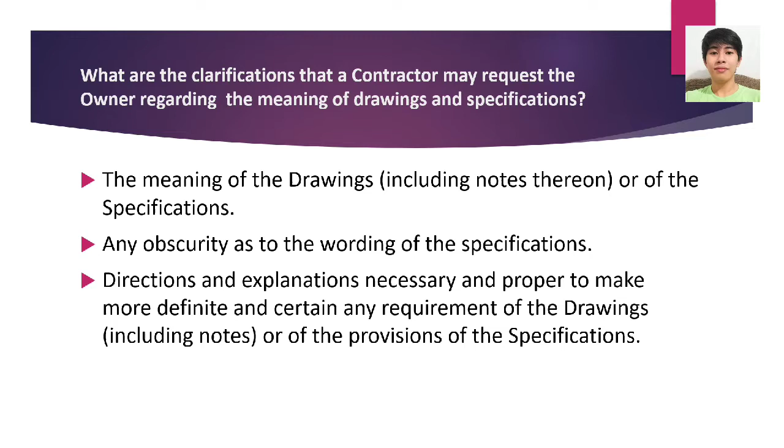So for the last question, what are the clarifications that a contractor may request the owner regarding the meaning of drawings and specifications? These clarifications include the meaning of the drawings, including notes thereon, or of the specifications, any obscurity as to the wording of the specifications, and directions and explanations necessary and proper to make more definite and certain any requirement of the drawings, including notes or of the provisions of the specifications.

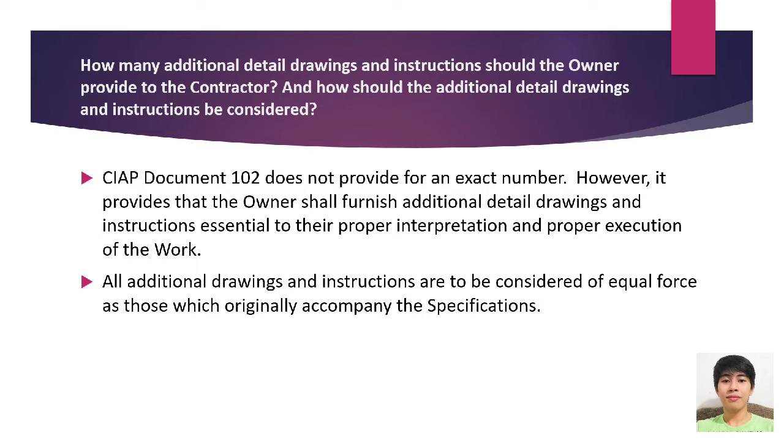Next, we have Article 4, Detailed Drawings and Specifications. How many additional detailed drawings and instructions should the owner provide to the contractor, and how should the additional detailed drawings and instructions be considered? CIAP Document 102 does not provide for an exact number. However, it provides that the owner shall furnish additional detailed drawings and instructions essential to their proper interpretation and proper execution of the work, and all additional drawings and instructions are to be considered of equal force as those which originally accompanied the specifications.

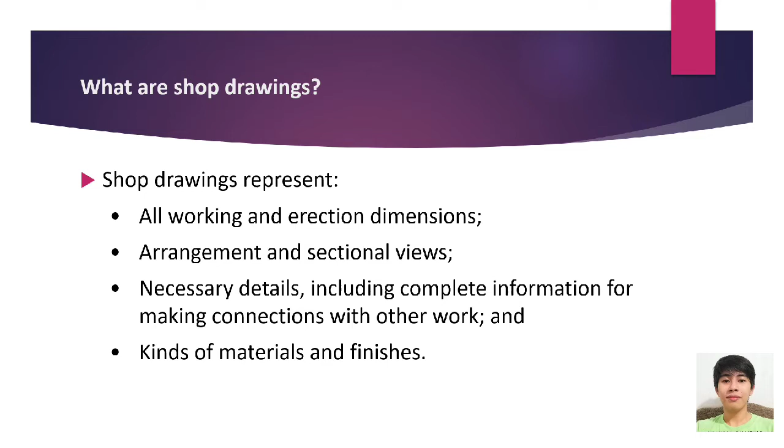Article 5. Shop Drawings. So first, what are shop drawings? Shop drawings represent all working and erection dimensions, arrangement and sectional views, necessary details including complete information for making connections with other work, and kinds of materials and finishes. Shop drawings shall also be dated, numbered consecutively, and shall contain the name of project, the descriptive names of equipment, materials and classified item numbers, and the location at which materials or equipment are to be installed in the work.

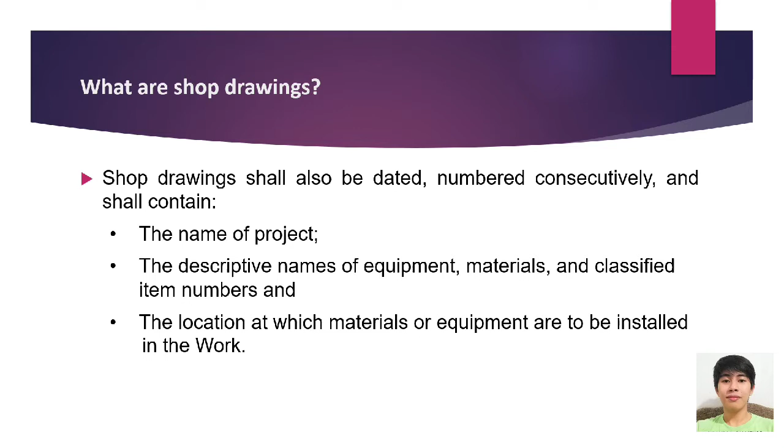Who prepares the shop drawings, and how many shop drawings should the contractor prepare and submit for the owner's approval? The contractor shall prepare all necessary shop drawings at his own expense. The contractor shall submit 2 copies of all shop or setting drawings, templates, patterns, and models. Submission of shop drawings shall be accompanied by a letter of transmittal in duplicate, or 2 copies, containing the name of the project, the contractor's name, number drawings, titles, and other pertinent data.

If the shop drawings show variations from the contract requirements because of the standard shop practice or other reasons, the contractor shall make specific mention of such variations in his letter of submittal. So for our final question, is the owner responsible in all cases for the accuracy of drawings? Generally, the owner is responsible except if the contractor is a specialty contractor or is engaged by the owner as a specialty contractor, in which case it is the specialty contractor which is responsible.

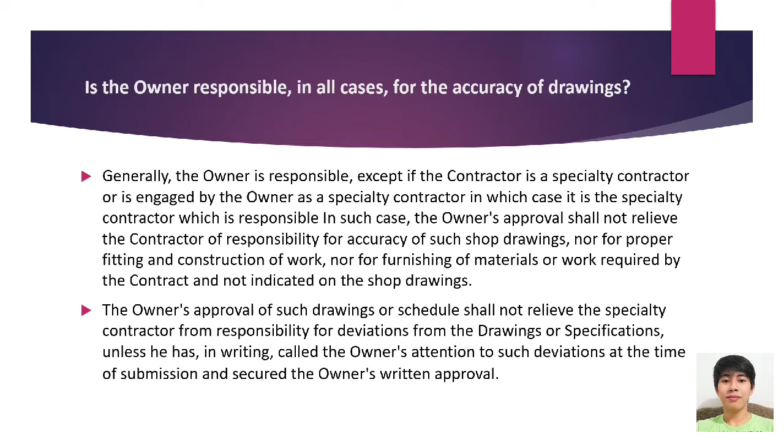The owner's approval shall not relieve the contractor of responsibility for accuracy of such shop drawings, nor for proper fitting and construction of work, nor for furnishing of materials or work required by the contract and not indicated on the shop drawings. The owner's approval of such drawings or schedule shall not relieve the specialty contractor from responsibility for deviations from the drawings or specifications, unless he has, in writing, called the owner's attention to such deviations at the time of submission and secured the owner's written approval. And this ends my report for Section 1, Definitions and Documents.

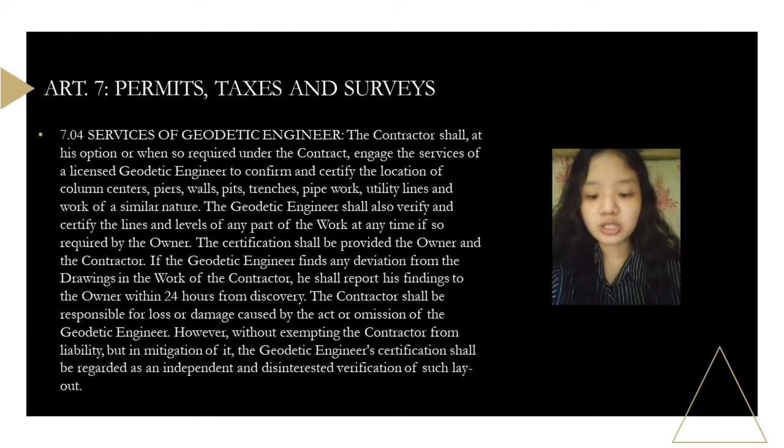7.04 Services of Geodetic Engineer. The contractor shall, at his option, or when so required under the contract, engage the services of a licensed geodetic engineer to confirm and certify the location of column centers, piers, walls, pits, trenches, pipework, utility lines, and work of a similar nature. The geodetic engineer shall also verify and certify the lines and levels of any part of the work at any time, if so required by the owner. The certification shall be provided the owner and the contractor. If the geodetic engineer finds any deviation from the drawings in the work of the contractor, he shall report his findings to the owner within 24 hours from discovery.

Section 3, Equipment and Materials. Article 8, General. All materials and equipment must conform to all laws now or which may be in force and applicable during the period of construction. The contractor shall bear all damages by reason of any delay in the work arising from his failure to comply with this provision. Where any revision or amendment to such laws is made during the construction period which affects the cost or time of completion of the contract, a constructive change in the work shall be recognized and the corresponding contract price and completion time adjustment shall be made.

Article 9, Equipment. 9.01 Quality of Equipment. In order to establish standards of quality, the owner, in the detailed specifications, may have referred to certain equipment by name and catalog number. This procedure is not to be construed as eliminating from competition other products of equal or better quality by other manufacturers where they are fully suitable in design.

9.02 Equipment Substitution. The contractor shall furnish the complete list of proposed substitutions, preferably prior to the signing of the contract, together with such engineering and catalog data as the owner may require. All requests for substitution of equipment shall be in writing. The owner will approve or disapprove the request in writing. No substitute equipment shall be used unless approved in writing by the owner. The contractor shall abide by the owner's judgment as to which proposed substitute items of equipment are judged to be acceptable.

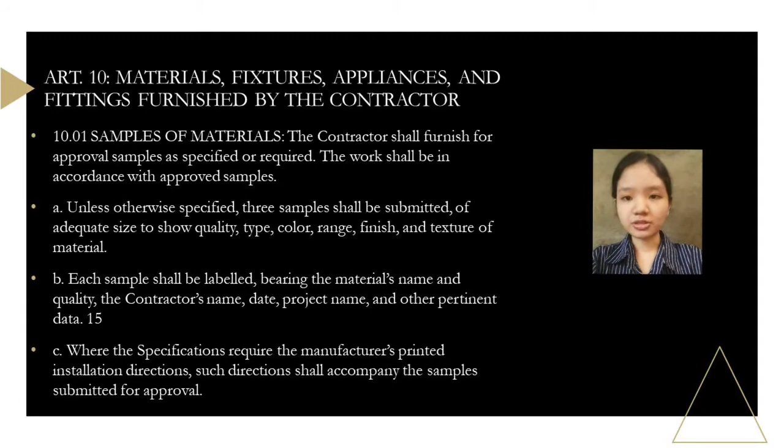Article 10. Materials, fixtures, appliances, and fittings furnished by the contractor. 10.01 Samples of materials. The contractor shall furnish for approval samples as specified or required. The work shall be in accordance with approved samples. From A to E.

10.02 Trade name materials and substitutes listed from A to D. 10.03 Testing samples of materials. The contractor shall submit to the owner as many samples as may be needed for purposes of testing. Testing of all samples shall comply with the specifications and government standards and shall be performed by a competent entity or testing laboratory approved by the owner. All costs of shipment, delivery, handling, and testing of contractor-supplied samples are to be paid by the contractor.

10.04 Quality of materials. Unless otherwise specified, all materials shall be new and their quality shall be of the best grade of their respective kinds, taking into account the nature of the project and requirements of the contract. 10.05 Storage and stockpiling of materials, as listed from items A to C.

10.06 Defective materials. All materials not conforming to the specifications shall be considered defective. The contractor shall remove or replace defective materials when ordered to do so by the owner. Upon the contractor's failure to do so, the owner may remove and replace them and deduct the cost of removal and replacement from any money due or to become due to the contractor. No materials, defects of which have been subsequently corrected, shall be used until the owner's approval is given.

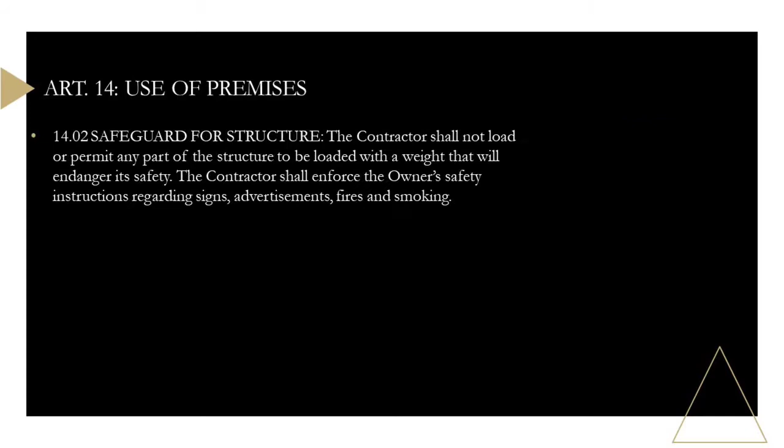Article 14. Use of premises. 14.01. Limitation of use. The contractor shall confine his apparatus, the storage of materials, and the operations of his workmen to limits indicated by law or directions of the owner, and shall not unreasonably encumber the work premises with his materials. The contractor shall not load or permit any part of the structure to be loaded with a weight that will endanger its safety. The contractor shall enforce the owner's safety instructions regarding signs, advertisements, fires, and smoking.

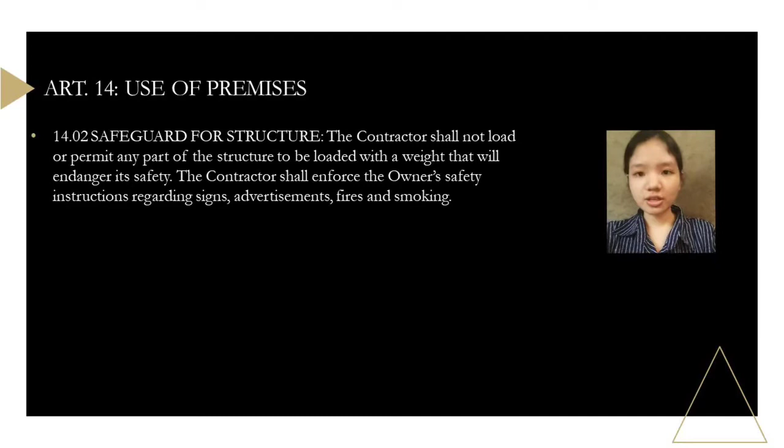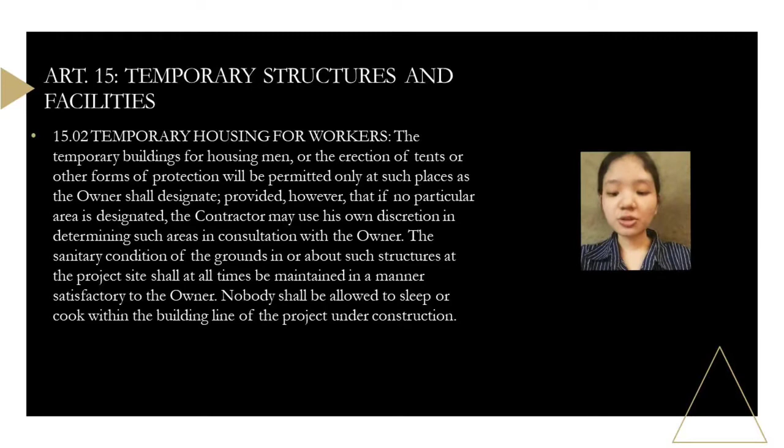Article 15. Temporary structures and facilities. 15.01. Temporary office and contractor's building. The contractor shall, taking into account the location and size of the site, at all times provide and maintain an adequate, weathertight temporary office with necessary basic facilities such as water, light, and telephone. 15.02. Temporary housing for workers. The temporary buildings for housing men or the erection of tents or other forms of protection will be permitted only at such places as the owner shall designate, provided, however, that if no particular area is designated, the contractor may use his own discretion in determining such areas in consultation with the owner.

15.03. Safety and sanitation. The contractor shall, from the commencement of the work until its completion: A. Furnish and put up all temporary barricades and guard lights necessary for the protection, proper prosecution, and completion of the work. B. Maintain guard lights at the top of the falsework tower, barricades, railing, etc. C. Provide and maintain ample sanitary toilet accommodation and other necessary conveniences, including water connections for the use of personnel and laborers on the work, properly secluded from public observation in such manner and at such points as shall be provided or approved by the owner, and their use shall be strictly enforced. D. Keep such places clean and free from flies. And E. Remove all connections and appliances connected therewith prior to the completion of the work.

15.04. Temporary signs. No signs or advertisements will be allowed to be displayed without the owner's approval. The contractor may erect one painted sign giving the names and addresses of the owner, the contractor, and the various subcontractors. The owner shall approve the size, color, lettering, and location of such temporary signs.

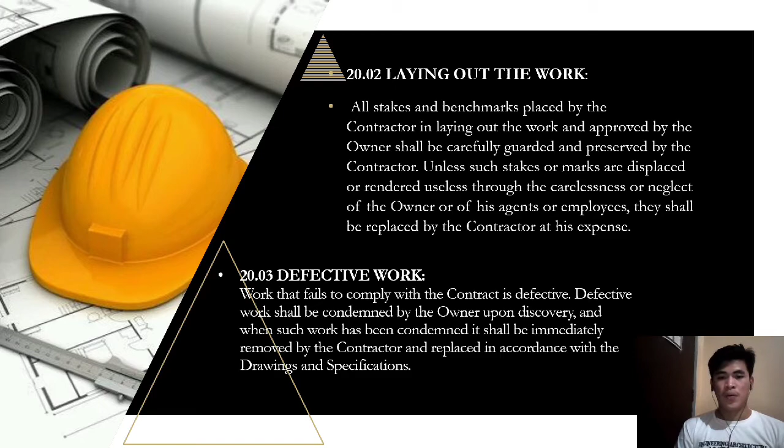20, Section 4. The inspection of work. The owner shall have access at all times to the work. The contractor shall furnish, without additional charge, reasonable facilities, labor, and materials necessary for the convenient inspection and tests that may be required by the inspector. The owner should provide inspectors authorized to witness the pouring of concrete. The absence of the owner's inspector at any time during the progress of the work shall be an implicit approval of the quality of the cement mix and the authority to pour it.

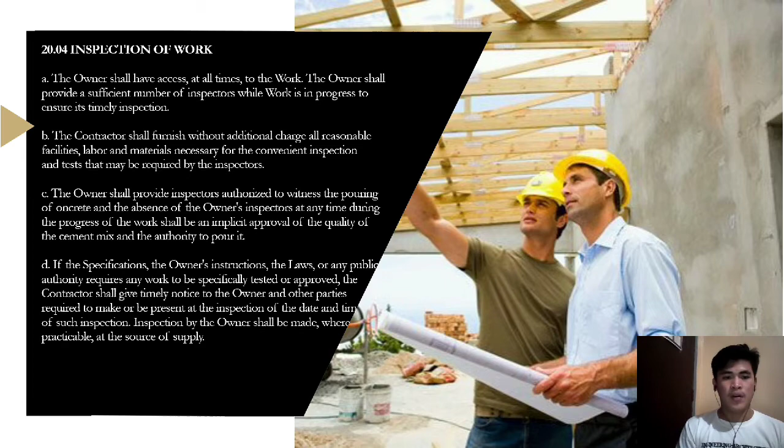If the specification, the owner's instructions, the law, or any public authority requires any work to be specifically tested or approved, the contractor shall give timely notice to the owner and other parties required to make or be present at the inspection of the date and time of such inspection. If any work should be covered up without timely notice to the owner or before the owner can make a timely inspection thereof, it must, if required by the owner, be uncovered for examination at the contractor's expense.

However, notwithstanding the failure of the owner to make a timely inspection of the work before it is covered, its re-examination may be ordered by the owner, and if so ordered, the work must be uncovered by the contractor at the owner's expense. But if such work is found not in accordance with the contract, the contractor shall shoulder the cost of uncovering and redoing the work.

If there are indications that the work done is not in accordance with the drawings and specifications, the owner may at any time before final acceptance of the work make an examination of the portion already completed by removing or tearing out the same. The contractor shall on request furnish all necessary facilities, labor, and materials. If such work is found to be defective in any material respect due to the fault of the contractor or his subcontractor, the contractor shall defray all the costs of such examination and of satisfactory reconstruction. And all inspections and tests shall be performed so as not to delay the work unnecessarily.

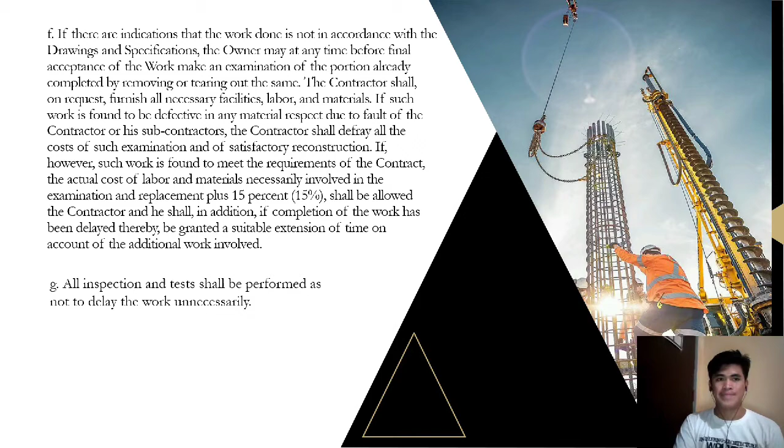Article 20, Passage 5. Work during an emergency. The contractor shall perform any work and shall furnish and install all materials and equipment necessary during an emergency endangering life or property. In such cases, Article 18 Passage 1 shall apply.

Article 20 Passage 6, increase or decrease quantities of work. Adjustment in works drawing to suit field conditions which cannot be foreseen at the time of calling for bids may be necessary during construction. It is the essence of the contract to recognize such changes in drawing as normal. The resulting change in quantities or the increase in the scope of work of the contractor shall be covered by a change order. Work done by the contractor without timely notice to the owner that an adjustment is required of contract price and completion time shall be at his own risk and expense.

Passage 7. Changes in the work. Change order by owner. The owner may at any time order extra work or make changes by altering, adding to, or deducting from his scope of work and within the general scope thereof, provided, however, that the resulting overruns or underruns from the quantities or costs in the bid do not exceed 25%. Such changes shall be ordered by the owner in writing.

Changes of subsurface condition. If during the progress of the work subsurface conditions at the site materially different from those shown on the drawing or indicated in the specification or in the contract document are discovered or encountered, the attention of the owner shall be called to such conditions before they are disturbed. The work shall be executed under the conditions of the contract. If changes under paragraphs A and B shall cause an increase or decrease in the amount due under the contract or in the time required for its performance, an equitable adjustment shall be made and the contract modified accordingly.

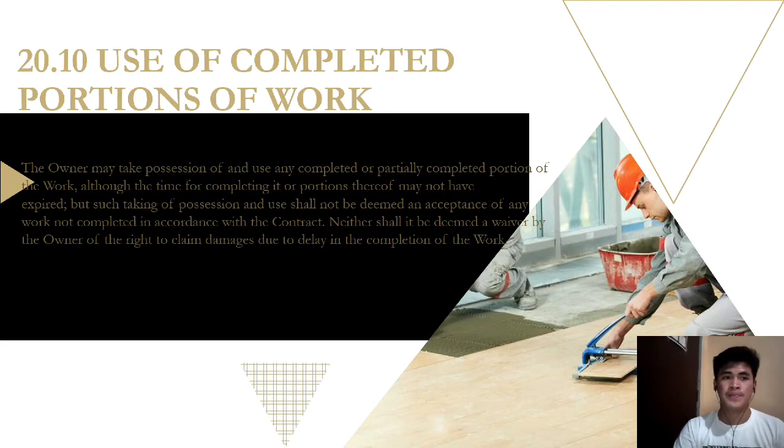Passage 11. Substantial completion and its effect. There is substantial completion when the contractor completes 95% of the work, provided that the remaining work necessary to complete the work shall not prevent the normal use of the completed portion. The owner shall be deemed to have recognized substantial completion of the work through the approval by the owner of the contractor's billing for completing at least 95% of the work.

The issuance of a certificate of substantial completion is an equivalent document. However, the date of this document should not be controlling if the substantial completion is shown to have been made at an earlier date, unless the contractor accepts the certificate without taking exceptions thereto in writing within 15 days from receipt.

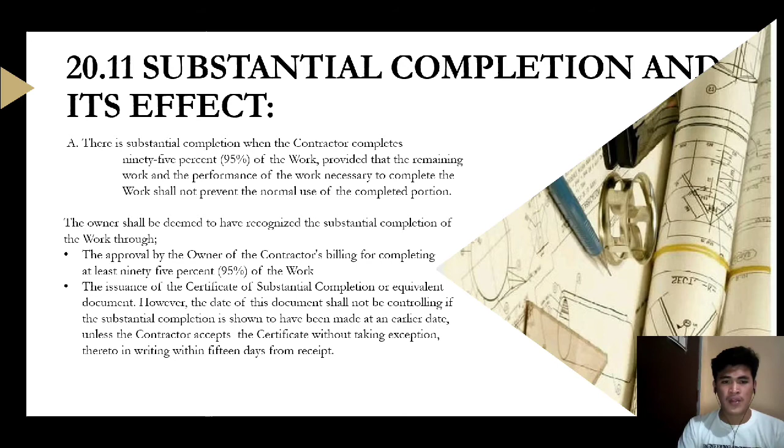The equipment, fixtures, and furnishings installed by the contractor, which the contract requires to be test run prior to acceptance, shall be test run successfully before the work can be accepted as substantially completed. The owner shall without delay cause the test run of the facility. Should the contractor be unable to completely install or furnish and test run the facility through no fault of his, the contractor shall automatically be entitled to an extension of completion time equal to the period of delay.

Issue to the contractor one or more lists of defects found or discovered on the completed work, otherwise known as a punch list, which the contractor must receive from the owner not later than 30 days from the date of substantial completion. The owner may add to the punch list items, but only as to corrected work on the items in the original punch list, not later than 60 days from the date of substantial completion.

No liquidated damages for delay beyond the completion time shall accrue after the date of substantial completion of the work. If the targeted date of completion has arrived and the contractor cannot achieve 95% completion of the work due to the uncompleted facility caused by the owner's fault, the contractor shall be deemed to have achieved substantial completion provided the contractor has completed at least 95% of the work minus the uncompleted facility.

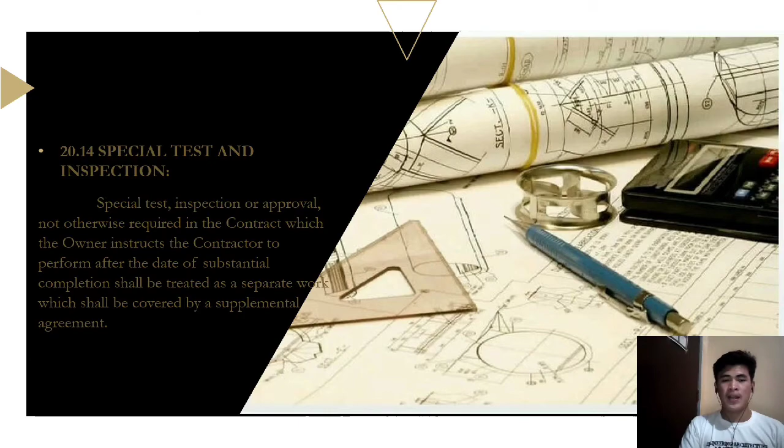Special test inspection. Special test, inspection or approval not otherwise required in the contract which the owner instructs the contractor to perform after the date of substantial completion shall be treated as a separate work which shall be covered by a supplemental agreement. Passage 15. The acceptance of non-conforming work. If the owner accepts defective or non-conforming work instead of requiring its removal and correction, the owner shall issue to the contractor a change order to reflect a reduction in the contract price where appropriate, by an amount not exceeding the value of the unfinished work as determined by the breakdown of work and the corresponding value.

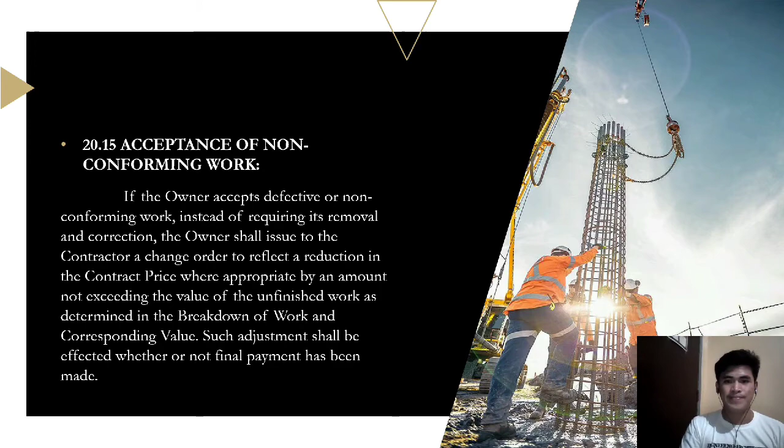Passage 16. The adjustment of prices. There shall be added to or deducted from the contract price such sums affecting the execution of the work, as follows. Adjustment of prices due to the escalation or reduction of cost of executing the work shall make use of a parametric formula to be agreed upon within 30 days by the parties. In default of such agreement, the parametric formula under applicable law shall be applied. Such an adjustment shall be made to provide equitable relief to both the owner and the contractor, allowing neither to gain nor lose by such fluctuation. The adjustment of prices shall be determined on the basis of the original contract unit prices of labor and materials and such unit prices in effect during the relevant period of work accomplishment.

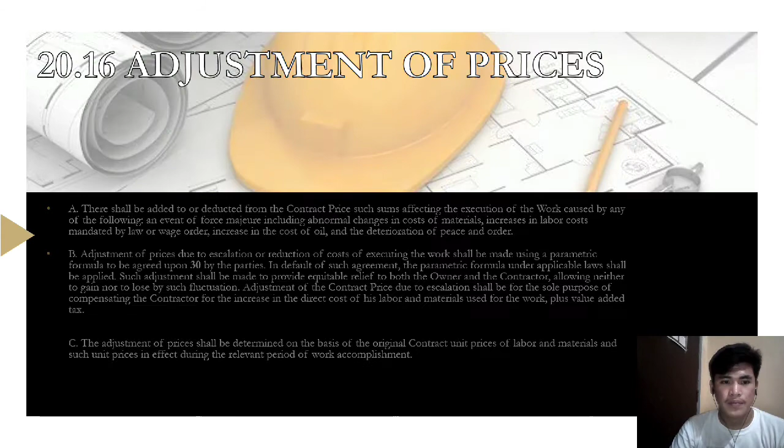Prices shall be adjusted not oftener than once a month due to the increase or decrease of the direct cost of labor and materials of more than 5% of the original contract unit price of the relevant items of work. The adjustment shall include the first 5%. In case the project is behind schedule by more than 15% from the approved construction schedule, not due to excusable delays, the payment for work accomplished shall be made on the basis of the contract price as adjusted in accordance with the escalation rate applicable during the period in which it should have been accomplished. This Article 20.16 shall not apply to an increase or decrease in the cost of materials and services provided or supplied by the owner.

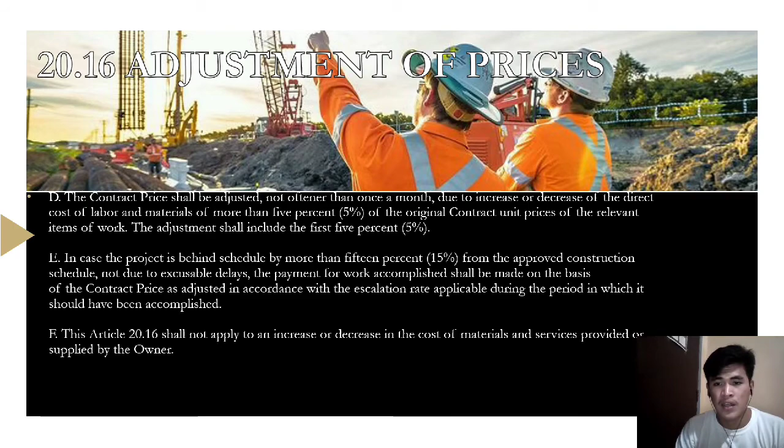Passage 17. Payment in legal tender. Payments in money under the contract shall be made in the currency stipulated, and if it is not legally possible to deliver such currency, then in the currency which is legal tender in the Philippines.

Section 6. Time of completion of work. When does the work commence and what is the period for its completion? Construction starts within 7 days upon receiving the notice to proceed unless may later date na in-state sa contract. For premature commencement, it is in the risk of the contractor unless mutual decision yun ng owner and the contractor, and the owner gave the contractor authority to start the work earlier. For completion naman, it shall be completed in accordance with the contract in a fixed date.

What is the construction schedule and what is its content? Construction schedule contains the approximate date each paid item will be started and completed, the equipments to be used, and number of men needed to complete the work and schedule, and this must be submitted immediately after the contract is effective. What happens in case of slippage or delays? In case of delay, pwede magpatawag ng meeting ng owner, and kapag napag-alaman na ang delay is caused by the contractor's negligence, the contractor must submit a catch-up schedule at dapat approve ito ng owner.

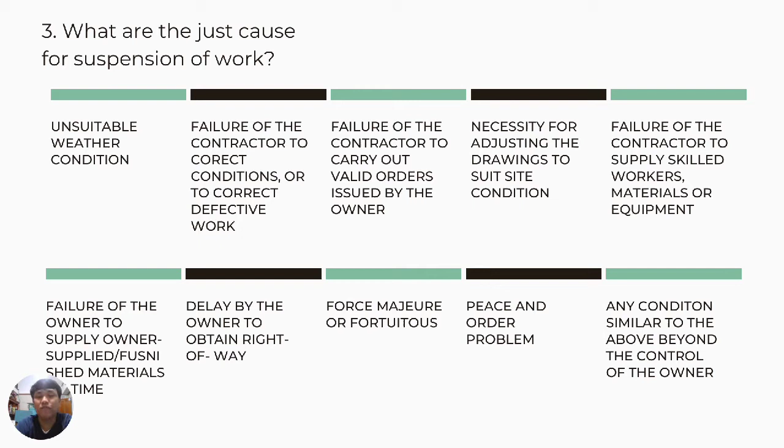And 6, failure of the owner to supply owner-supplied or furnished materials on time. 7, delay by the owner to obtain right-of-way. 8, force majeure or fortuitous event. Ito yung mga out-of-hand na event tulad ng gera, kung sakali man, huwag naman sana. And 9, peace and order problem. And 10, any condition similar to the above beyond the control of the owner.

Article 28, owner's right to terminate contract. Number 1, can the owner terminate contract without prior notice to the contractor? Yes, upon occurrence of any of the following events. Number 1, if contractor is adjudged bankrupt or insolvent. 2, if contractor makes a general assignment of his assets for the benefit of his creditors. Number 3, if a trustee or receiver is appointed to the contractor or for any of the contractor's property. And last, if the contractor files a petition for suspension of payments or for reorganization under the bankruptcy law.

Number 2, are there instances when the owner is required to give prior notice before terminating the contract? Answer is yes. The following grounds for termination with cause require 15 days written notice. Number 1, the contractor repeatedly fails to supply sufficient number of skilled workmen, or suitable materials or equipment in the schedule. Number 2, a contractor repeatedly fails to make without just cause prompt payments to subcontractors for labor, materials, or equipment, and completion of the work is being delayed. Number 3, the contractor disregarded the laws or orders of any public body having jurisdiction. And last, the contractor otherwise violates in any substantial way any provision of the contract.

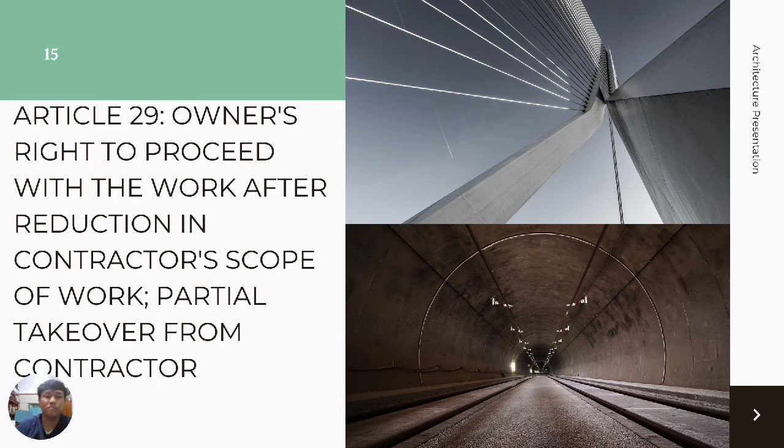Article 29, owner's right to proceed with the work, reduction in contractor's scope of work, partial takeover from contractor. Number 1, when can owner elect to carry out the work? The owner may, after 7 days following the receipt by the contractor of written notice and without prejudice to any other remedy, and without terminating the contract, elect to carry out the work if the contractor, number 1, repeatedly fails to supply sufficient skilled workmen or suitable materials and equipment. Number 2, repeatedly fails to make prompt payments to subcontractors for labor, materials, or equipment. Last, fails to perform the work in accordance with the contract.

Number 2, what happens to the materials and equipment at the site? Kailangan alisin ng contractor ang mga materials and equipment na hindi naman kailangan ng owner para sa project. At kung ang materials or equipment ay hindi pa pag-aari ng contractor, may choice ang owner kung gagamitin niya ito o hindi. At kung gagamitin naman ay kailangan magbayad ng renta or upa para sa mga materials and equipment na gagamitin ng owner.

Number 3, what are liquidated damages? Liquidated damages are those agreed upon by the parties to a contract to be paid in case of delay in completion of the work.

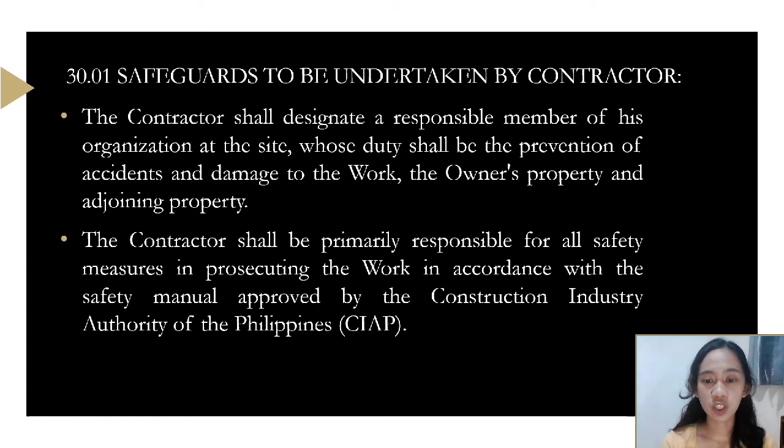The contractor shall designate a responsible member of his organization at the site, whose duty shall be the prevention of accidents and damage to the work, the owner's property and adjoining property. The contractor shall be primarily responsible for all safety measures in prosecuting the work in accordance with the safety manual approved by the Construction Industry Authority of the Philippines, or CIAP.

The next one is Article 30.02, or owner not to be responsible. The contractor shall render the owner free and harmless for the death of, the disease contracted or injury received by the contractor or any of his employees or laborers, for any damage done by or to the contractor's plant or materials from any source or cause, and for damages caused by the contractor or his employees to any property of the owner and adjoining property.

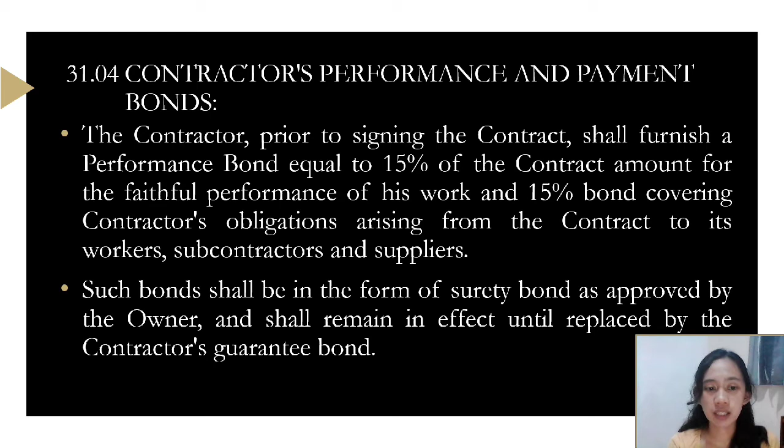Such bonds shall be in the form of surety bond as approved by the owner and shall remain in effect until replaced by the contractor's guarantee bond. Sunod naman ay ang contractor's guarantee bond. The performance and payment bonds will be released by the owner upon posting by the contractor of a guarantee bond, equivalent to the amount of the retention released to the contractor. The guarantee bond shall be for a period of 1 year, commencing from the date of posting as a guarantee that all materials and workmanship installed under the contract are of acceptable quality.

So, guarantee bond, these are funds released to the contractor once work is done and it guarantees the great work or at least of acceptable quality. The next kind of bond is the contractor's guarantee warranty. The contractor shall, in case of work performed by his subcontractors and where guarantees are required, secure guarantees from said subcontractors and deliver copies of the same to the owner upon completion of work. The term guarantee shall include warranty.

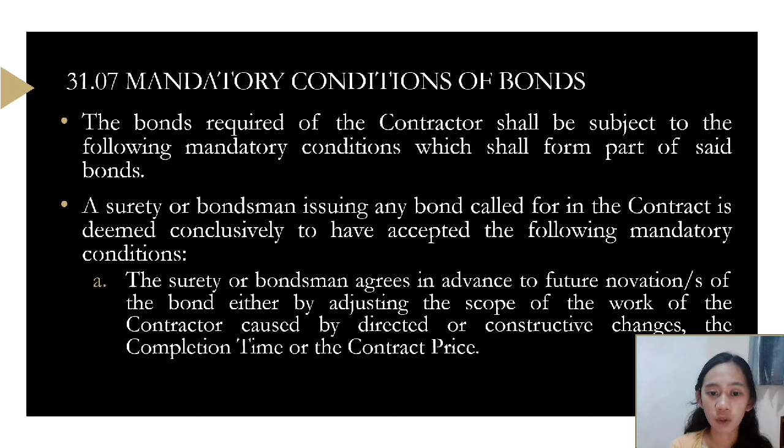Letter B, the bond issued shall continue to have force and effect beyond the effectivity period stated in the bond, if the work or the obligation for which it was issued has not been completely performed.